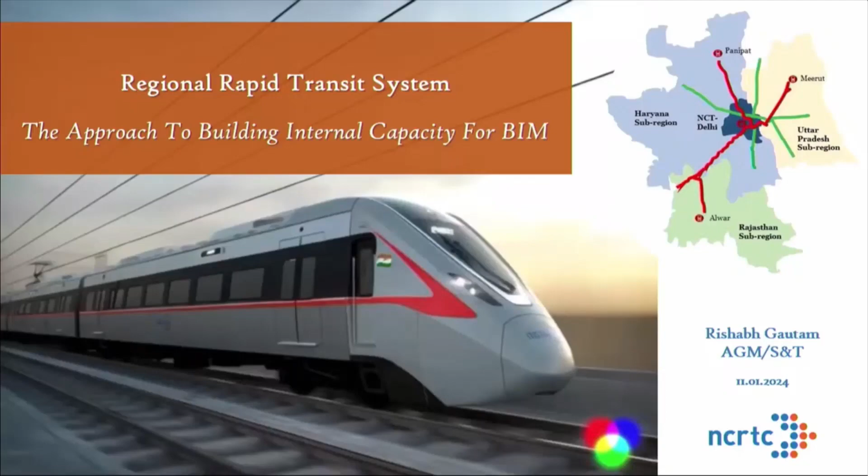So in this presentation, we'll be covering what the NCRTC RRTS project is, Namo Bharat, which was recently inaugurated by our Honorable Prime Minister on 20th of October. A BIM workflow overview, which has already been covered, but I'll just quickly go through it. What we mean by BIM implementation in NCRTC, as in what deliverables we are expecting our contractors and our consultants to give. What is the current status of BIM implementation in NCRTC, where we stand right now as on date.

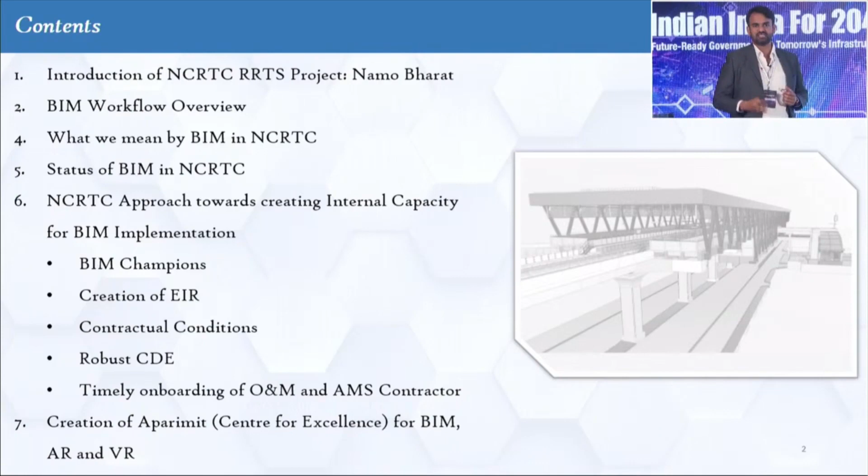And then we'll directly jump into the topic about how NCRTC has created an internal capacity within the organization so that we can derive the maximum out of this BIM implementation challenge that we took up. So Regional Rapid Transit System is trying to fill in a gap between national level transport and city level transport. We are trying to connect regions within a 20 to 150 kilometer range, Delhi with the neighboring satellite towns with a semi-high speed transport. So our trains are designed to travel at 180 kmph and travel at 160 kmph.

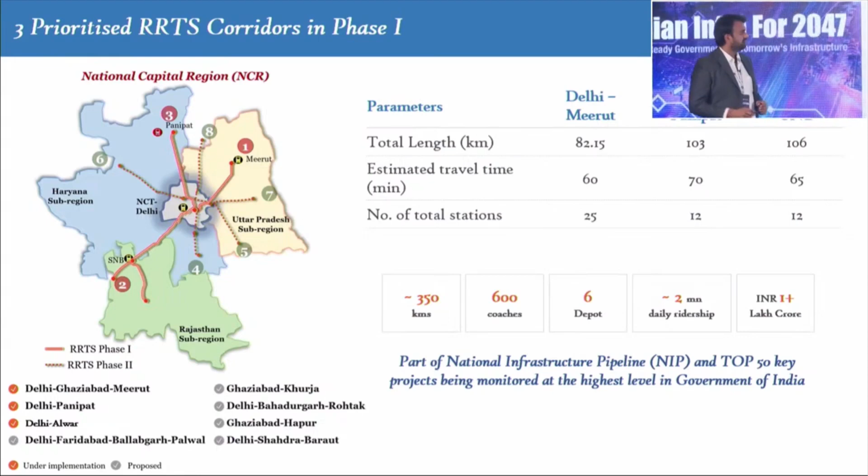So NCRTC, National Capital Region Transport Corporation, is tasked with building India's first regional rapid transit system corridors. So in phase 1, we have prioritized 3 corridors, of which the Delhi-Meerut corridor is already under construction, and the first 17 kilometers has already been inaugurated. The other 2 corridors are Delhi-Panipat and Delhi-SNB. And this is already part of the national infrastructure pipeline which Abhishek ji was talking about earlier. And there are 5 other corridors planned as part of the RRTS plan.

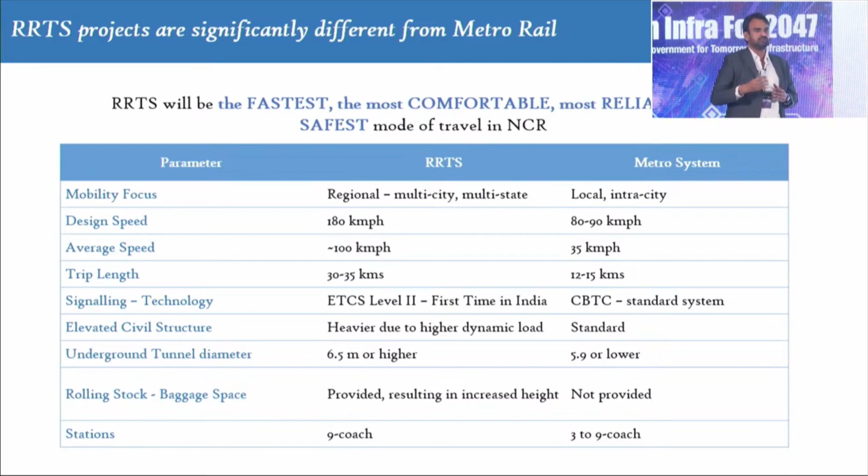So as I said earlier, the RRTS vis-a-vis metro is a semi-high speed rail infrastructure designed for 180 kmph with an average speed of 100 kmph including stoppages. Now this really takes the suburban cities within the reach, so people can actually commute daily and go back to their hometown after they have done their jobs or studies.

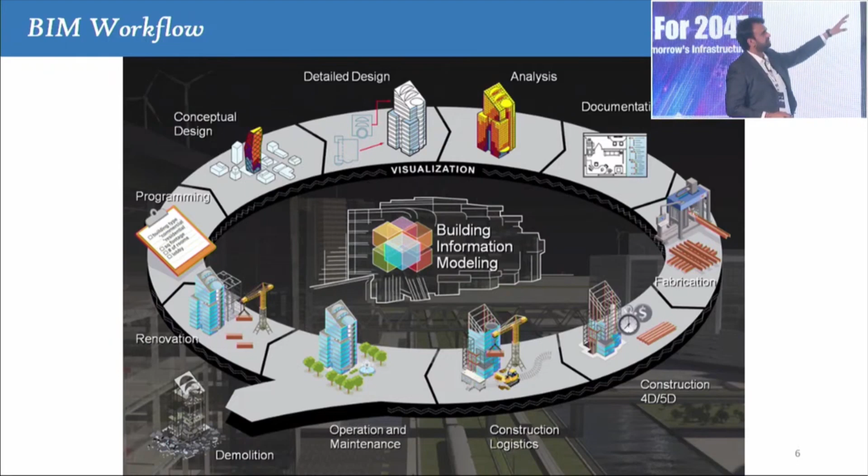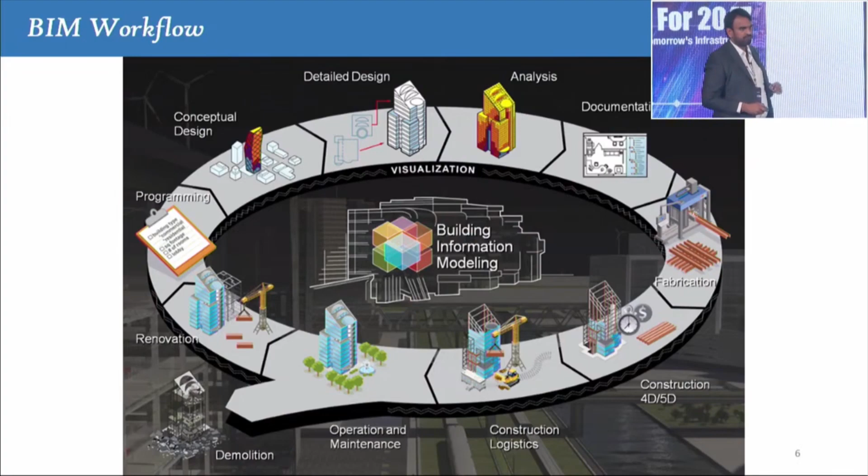So I'll directly jump into the BIM workflow. NCRTC has adopted BIM from the very beginning. Right from the programming and conceptual stage, we have followed all the steps which we are all aware of. So I won't talk in detail about all these steps, but jump into what we mean when we say BIM implementation in NCRTC. So 3D is a given, right? But we have a shared information model. So these are not just dumb 3D models, they have rich metadata captured within this 3D model.

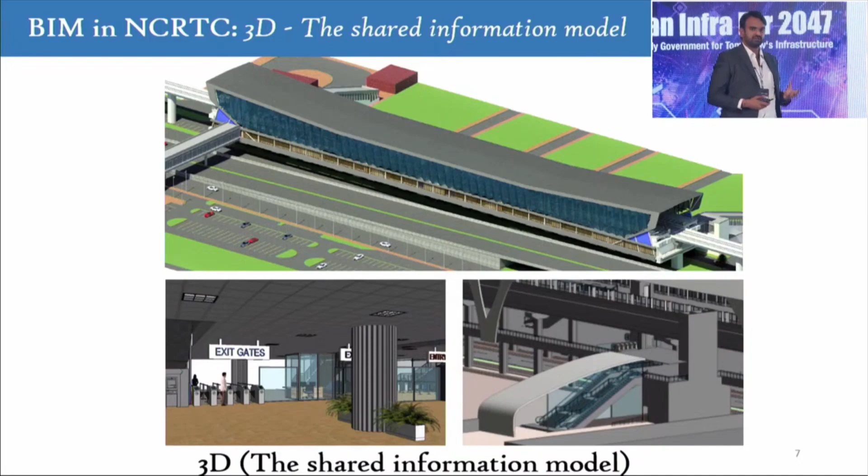We have already implemented 4D BIM, and recently we have had the, can we mute it?

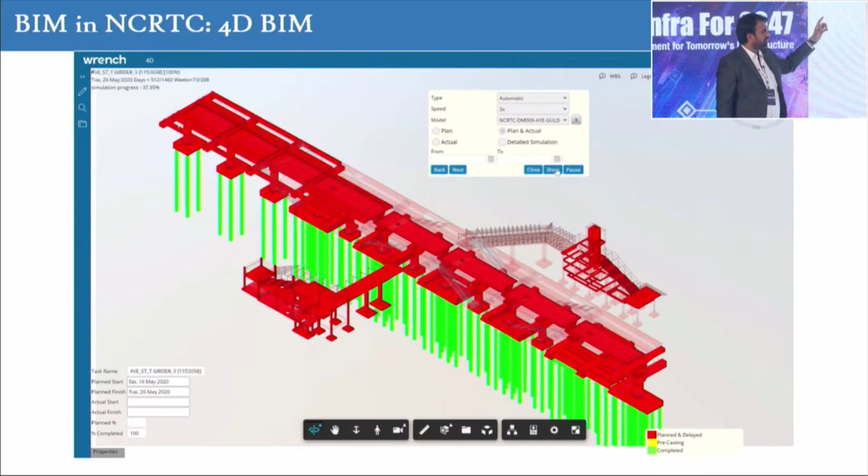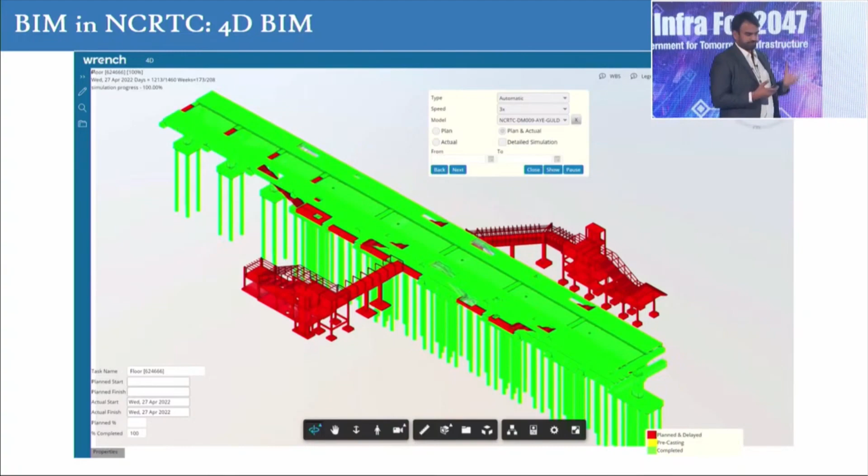And recently we have already inbuilt the capacity of 4D BIM within our common data environment. Earlier we were relying on third-party tools. Now our common data environment actually supports 4D BIM implementation in itself. This is all within the browser, so we don't require any third-party tools. Anyone with a laptop or a phone can actually visualize 4D models right from their tablets or laptops. Again, we are touching upon 5D. We are also implementing 5D where we do cost estimation and cost extraction from the BIM models.

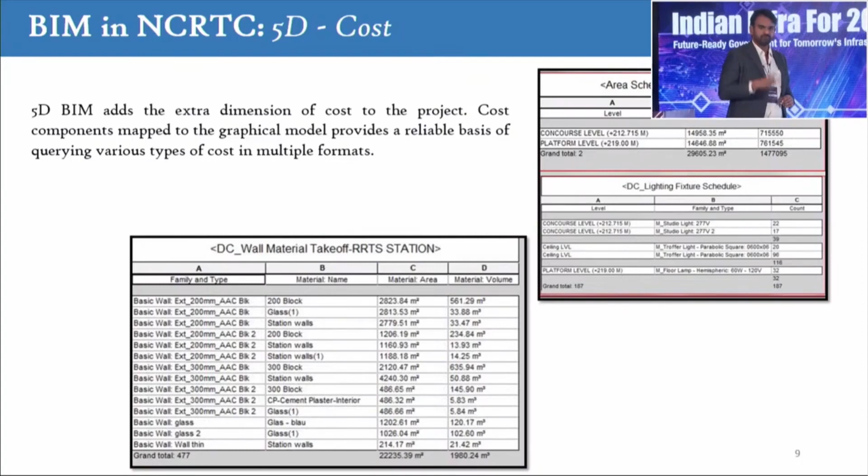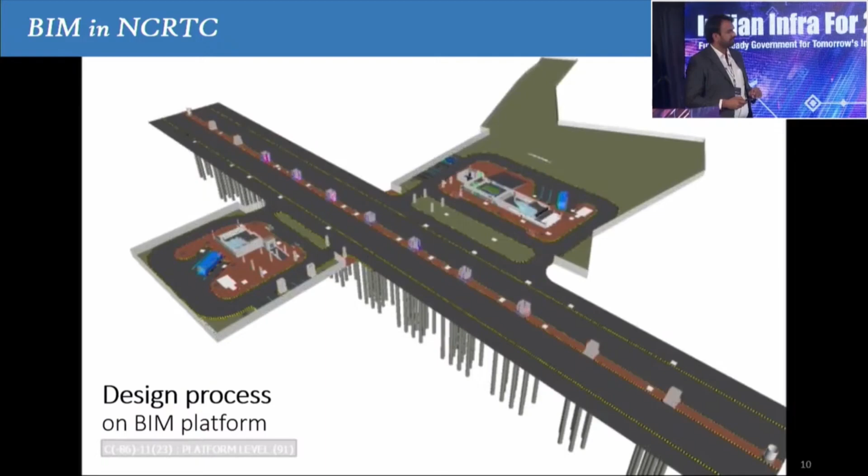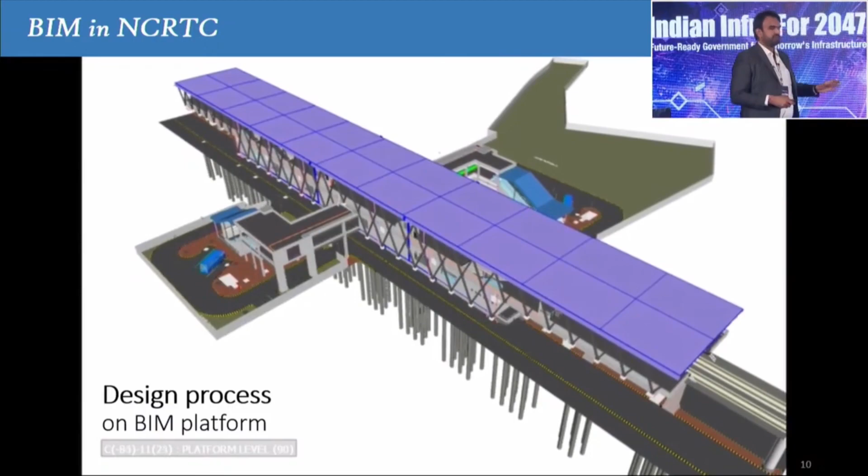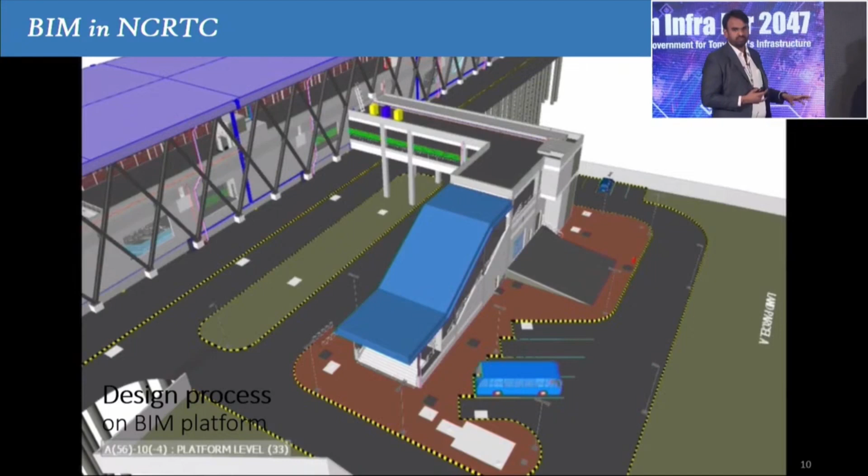This is an interesting video. I'll just let this video play through. This is the design process that we follow. And as said by the earlier speakers, it is very important to actually create the complete 3D model before the actual construction begins. So we were able to build this station as a digital twin even before the construction began. This is very important because once this was done, we were able to integrate it with GIS and assess what utilities needed to be shifted. So even before our contractors were mobilized, we were able to do all utility diversions in time, which saved a lot of time and cost.

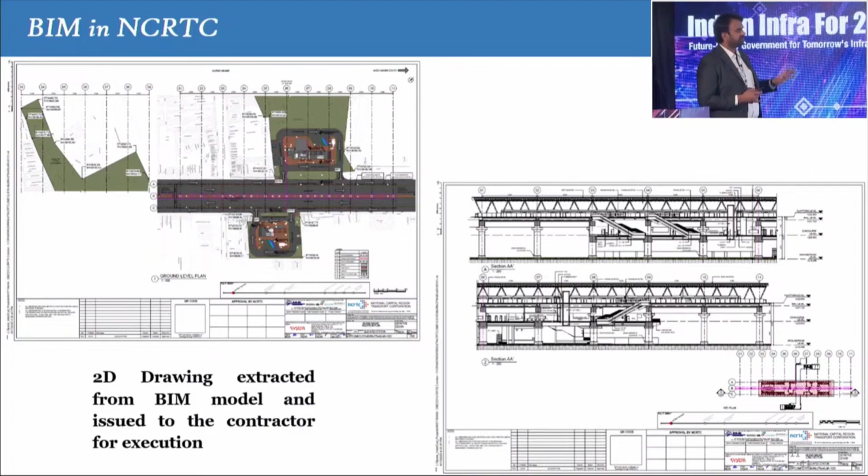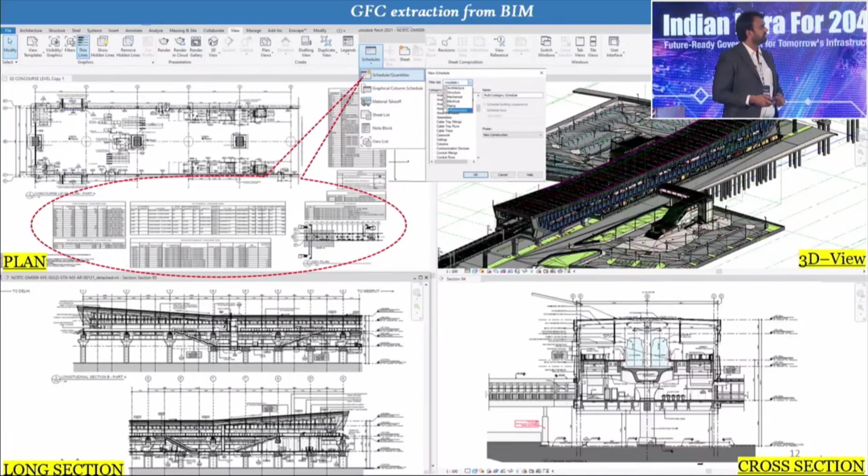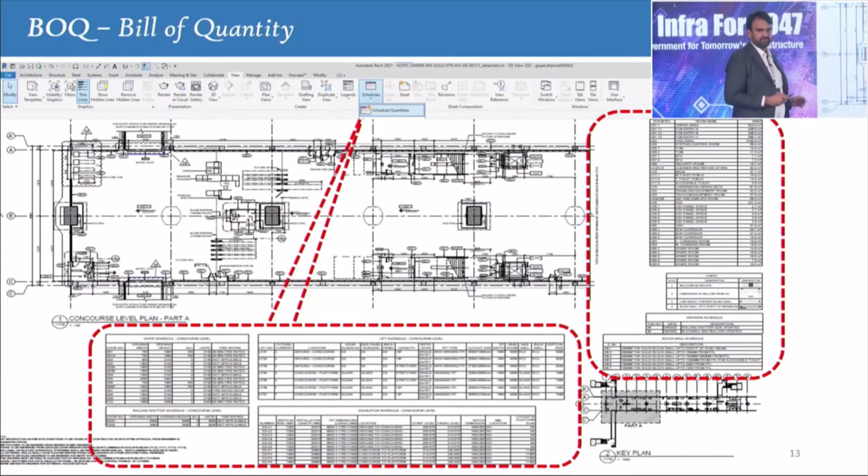When we talk about BIM in NCRTC, there are no 2D drawings. Everything is made in 3D, and 2D drawings are an output of all 3D models. And we have created and formulated these templates, which all our contractors need to follow. Good for construction drawings are extracted from BIM models automatically. Detailed schedules and quantities are also extracted from the BIM models automatically. The bill of quantity, as I said, is extracted automatically from our BIM models, and it's an automated task. It's a one-click process. It really saves time and cost even for our contractors and designers.

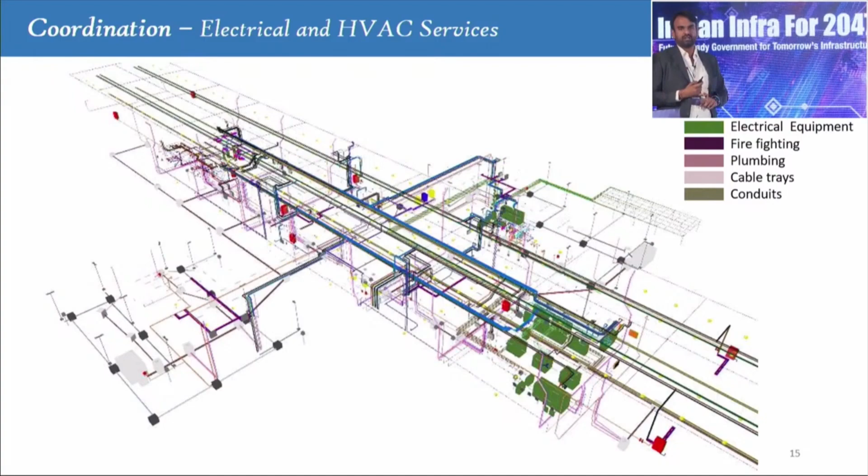So we are implementing BIM across all verticals, be it civil, electrical, plumbing. Even our system contractors are on the BIM platform, and they're providing us 3D models of all the system assets available.

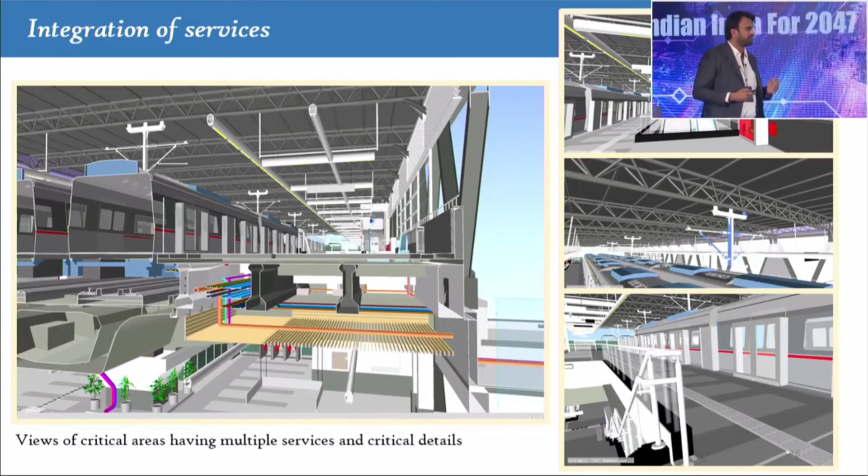Just to highlight, so everyone knows what BIM is. We have seen a lot of 3D models, just trying to show that we have actually implemented BIM to the level that we wanted it to be. So even the small pipes, conduits, wires, everything is modeled. And this is what we defined in our EIR, our employer's information requirement, to what level of detailing we really want information to be captured.

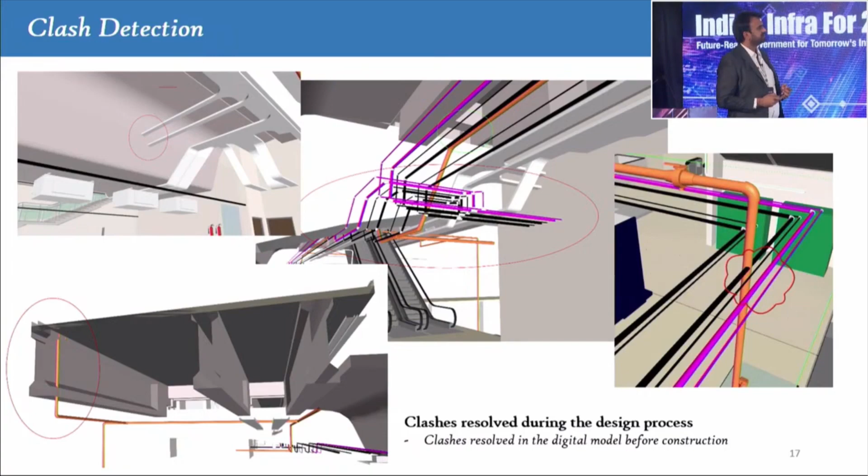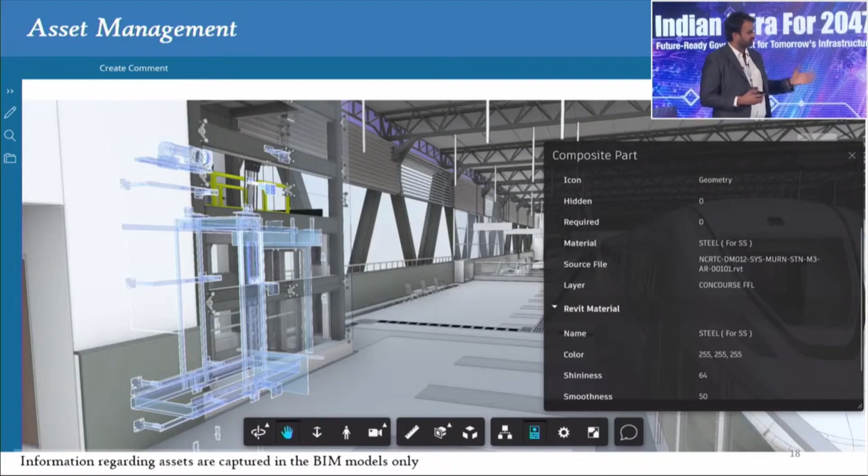Clash detection, the obvious benefits that we get during the construction phase of the project. And then going to the 7th dimension, that is asset management. So we have IBM Maximo as our AMS system, and we are lucky enough that our contractors and our AMS contractors are both onboarded right now, and they're able to interface and iron out any problems that may arise while transforming information through COBie from our BIM to our AMS system.

So now jumping to the topic at hand. What is the status of BIM in NCRTC, and how we actually ended up building capacity for BIM implementation within NCRTC. So as I said earlier, NCRTC has already adopted BIM from the very beginning of the project. So I joined NCRTC in 2017, and even then there were only a handful of employees. There were 10 employees in the organization at that point of time in 2017, and we were given a very clear mandate that we want to adopt BIM processes.

And the very first step was we wanted to create a BIM EIR and get a very robust common data environment. Now, I cannot emphasize it enough that we need to have a very robust and user-friendly common data environment. I have seen good projects fail because the common data environment was very complicated. People did not want to use the common data environment.

So when we started this journey in 2017, we visited many projects across India to study the BIM implementation that they were doing. And we created reports of what are the good aspects of those BIM implementation projects. We visited Nagpur, we visited Hyderabad, and then we understood that this is what they did right, and these are the mistakes that we can actually learn from. We incorporated all those learnings in our EIR, and we spent a lot of time in creating a tender for a common data environment, which would actually give us a cost-effective common data environment which is easy to use.

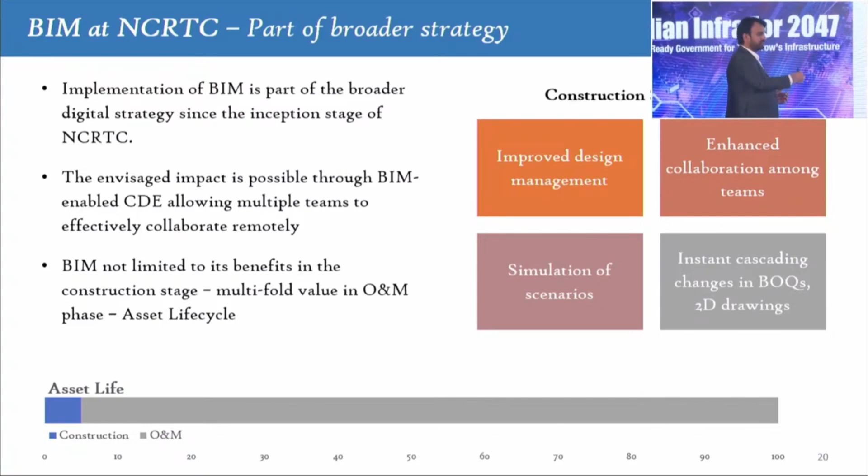And as everyone has said before, BIM is not limited to the benefits during the construction phase of the project. So imagine, the Delhi Meerut corridor is a $4.5 billion project, 30,000 crores, right? The construction phase of the project was greenlit in 2019, and we have already constructed and launched the first priority corridor. So the construction phase of the project is 4 to 5 years, right? Most of the benefits and the life of the project is going to be for the next 50, 60 years. So how do we derive benefit of all the rich information that we have gathered in our BIM models during the asset maintenance phase? This was our focus from the very beginning, and this we very accurately captured in our EIR.

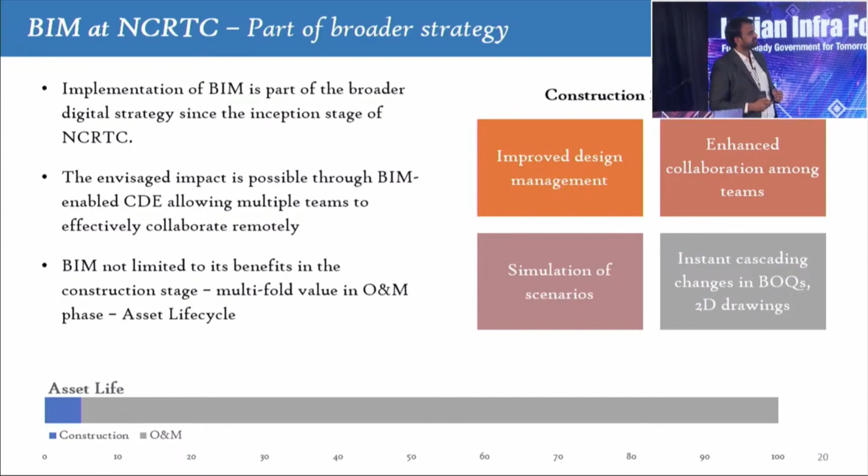So as rightly said by Darshan and Abhishek ji before me, we really need to nominate champions. If we want to make any project successful, it is very important, very critical that we identify champions within the organization who will take this endeavor forward. So very early on in the project, we involved many people from all verticals of the organization and made them BIM champions, who were then tasked to spread this information of how to use BIM and why BIM was necessary within the organization.

Procuring a BIM-enabled common data environment, that was critical. And then followed by creation of a detailed employer's information requirement and of robust BIM templates and standards. So because of the lack of any standardized BIM templates and EIR to follow, we took it upon ourselves to create an EIR from scratch in NCRTC. And in order to have uniformity in the drawings and models submitted, we created our own BIM templates and BIM standards.

And then what we did was we mandated these EIRs and templates through contracts. These standards were created before we floated the contracts, and this is very critical. If your contracts are floated which do not have any clauses for mandating BIM implementation by your contractors, they will avoid it at all costs. But when you make it part of the contract, they can't avoid it, and they'll have to deliver it.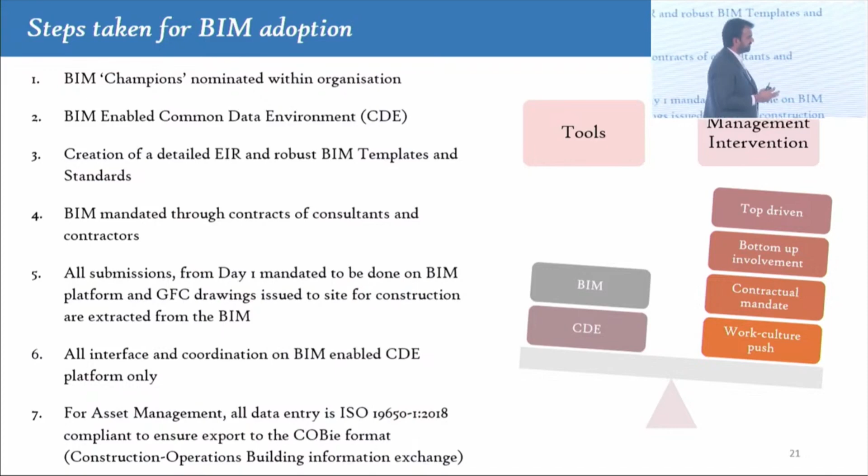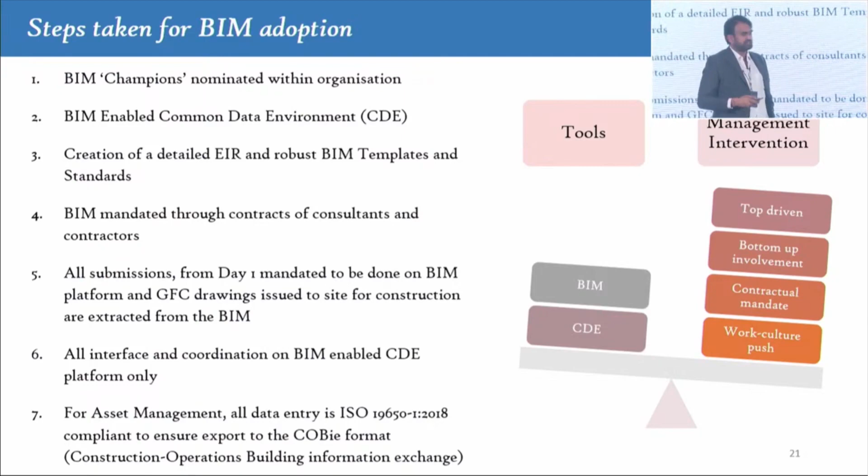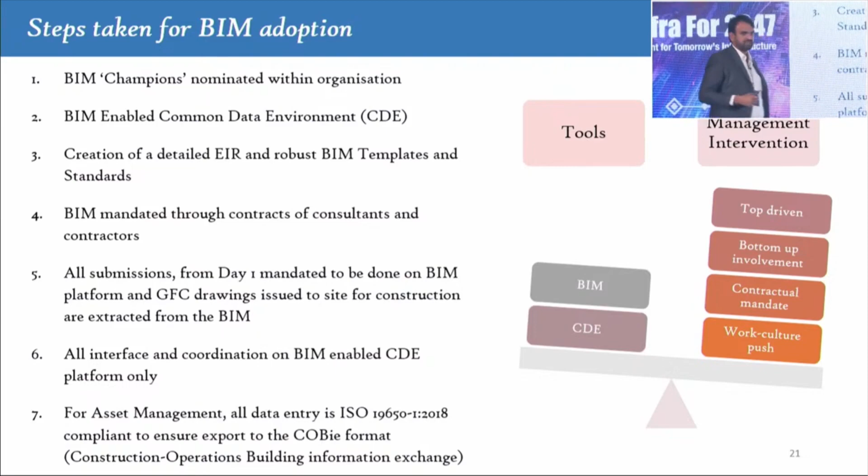Now, what is more important? If you see that figure, the tools are important. BIM tools and the common data environment are very important. But what is more important, it has to be a management-driven initiative. It has to be a top-down initiative. If the management supports this, everyone will actually fall in line with it. And then you need to build up competency from the ground level, because the high-level management can only get involved to a certain extent. The day-to-day usage falls with the junior engineers, the civil engineers, the assistant managers. They really need to be updated on the latest technology available. And then we talk about contractual mandate and work culture push.

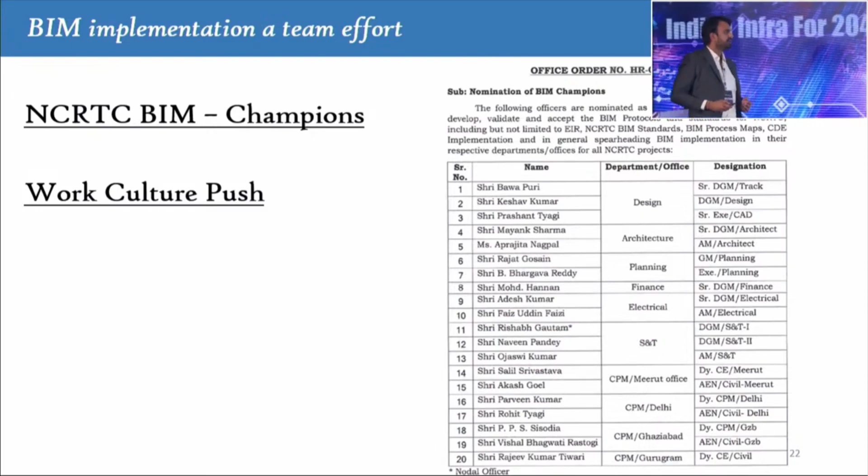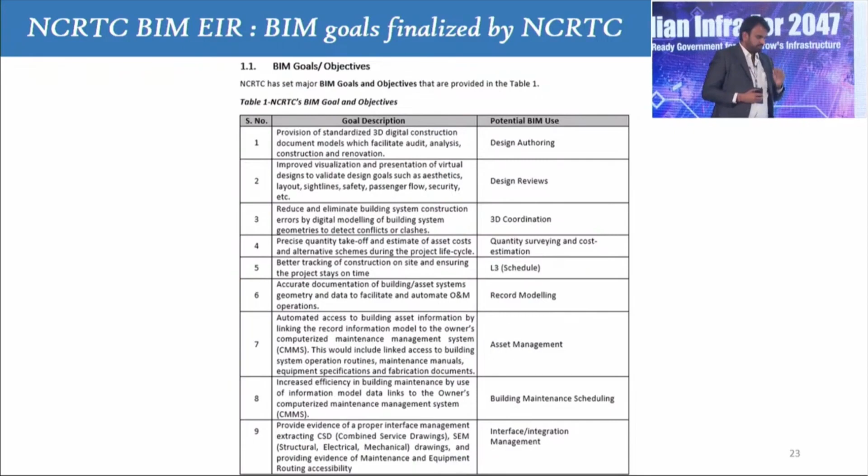Then we created a BIM EIR, where we detailed out the BIM goals and objectives we understand from BIM. BIM is a very wide topic, which can have a lot of meanings for different verticals and companies. So what we expected out of our BIM models as NCRTC, as a railway project, we really detailed out in our BIM EIR, which was a 40-60 page document that comprehensively captured what we needed.

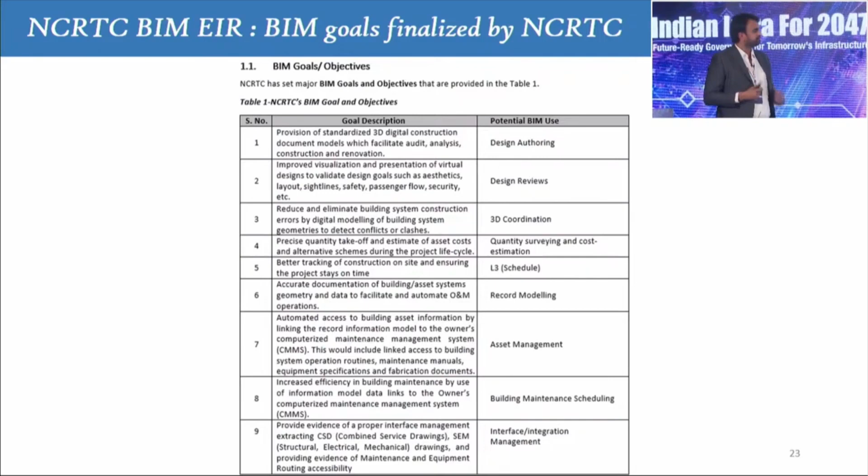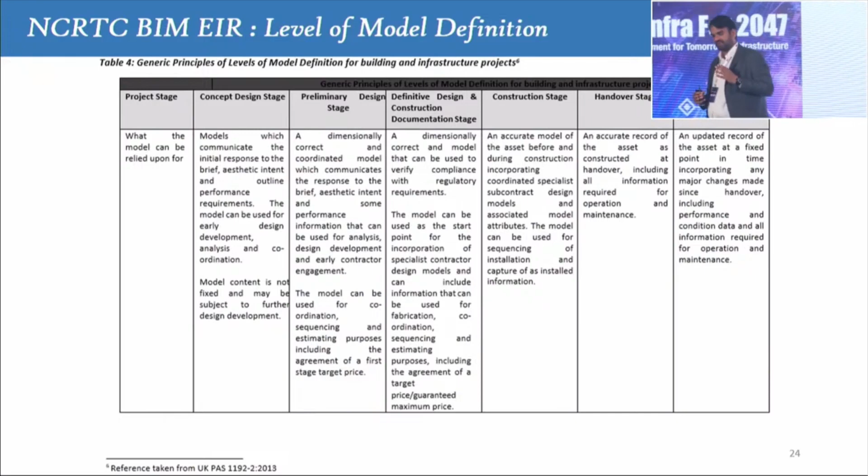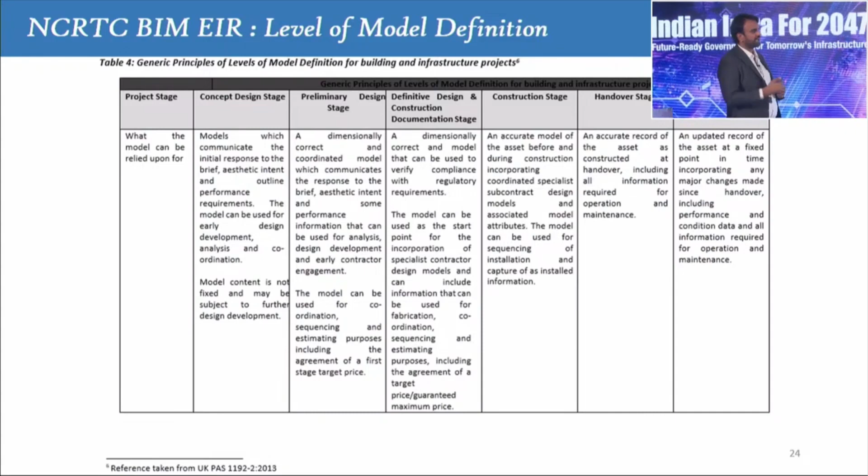And then we detailed out at various levels of project delivery what the contractor needed to deliver. If our EIR and standards are elaborate enough, the contractors can correctly estimate the time and effort they need to put into the project, which avoids conflicts later during execution. If we do not have a very elaborate EIR, we will have conflicts: this was not asked in the contract, you are asking for something more, it's costing me more. They would land up in variations. But having a well-detailed and clear-cut EIR enables us to have smooth project delivery without any conflicts with our contractors.

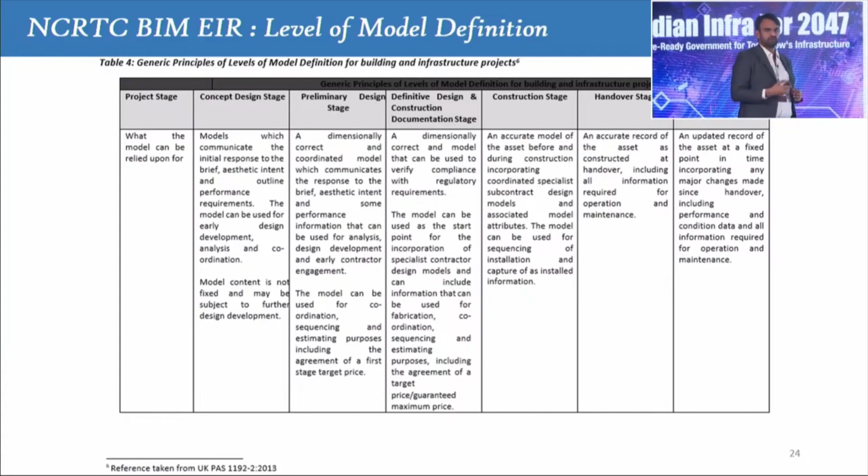So within every contract in NCRTC, there was a separate annexure for EIR and CAD standards that we created within NCRTC. This really helped us achieve the BIM objectives that we were looking for. It would not have been possible if this was not done. All the steps that we have mentioned are critical, but again, having contractual conditions implemented into the contract is of utmost importance.

Apart from the EIR and BIM standards, we made it very clear that we will not be responsible for any training. This was one of the feedbacks that we were getting from the industry, that people are not trained on it. We did the market study, we did the analysis, and we found out that there are trained resources available in the industry right now, and we made it very clear that we will not be involved in the training of those resources. You just hire the right resources and get them on the project. Let them train it, right? Because otherwise they would have used this as an excuse to delay the implementation of the project.

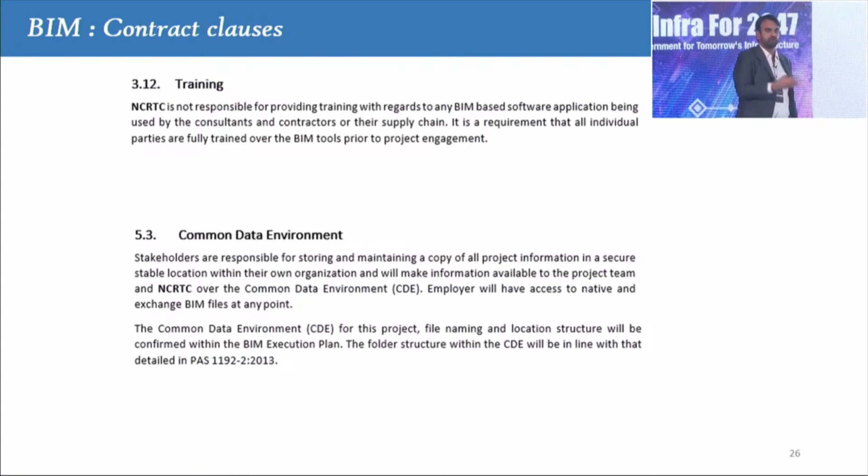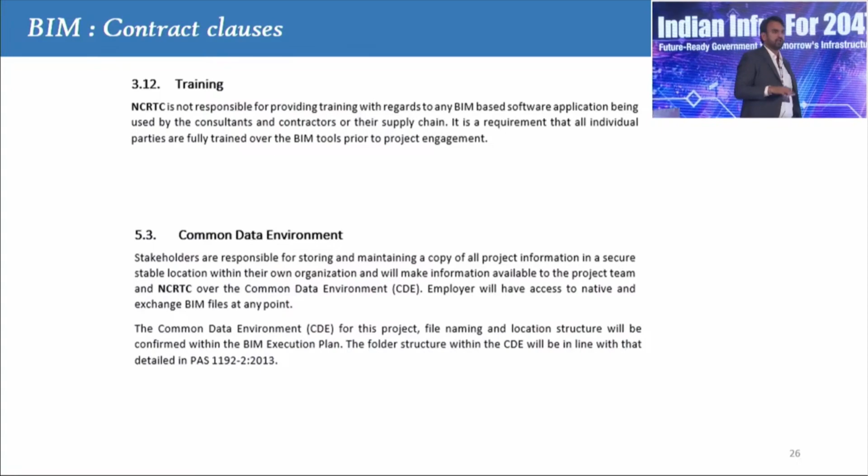We took it upon ourselves to provide the common data environment free of cost to all contractors. Now, a common data environment can only be successful if it is implemented at the grassroots level. That actually meant handing out a lot of licenses. Luckily, India being a software IT hub, we were able to get a really good and competent common data environment at a very cost-effective rate. And we had unlimited licenses built into our contract. So we were able to actually hand out common data environment licenses right across NCRTC for all employees, and even multiple licenses to our contractors.

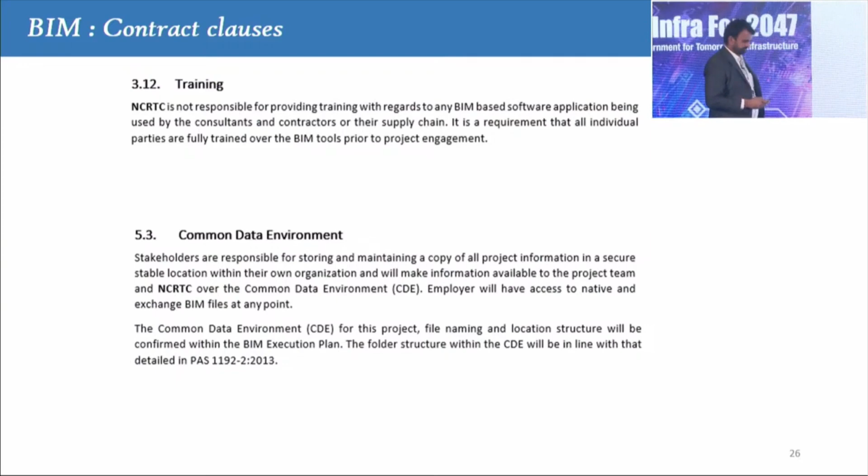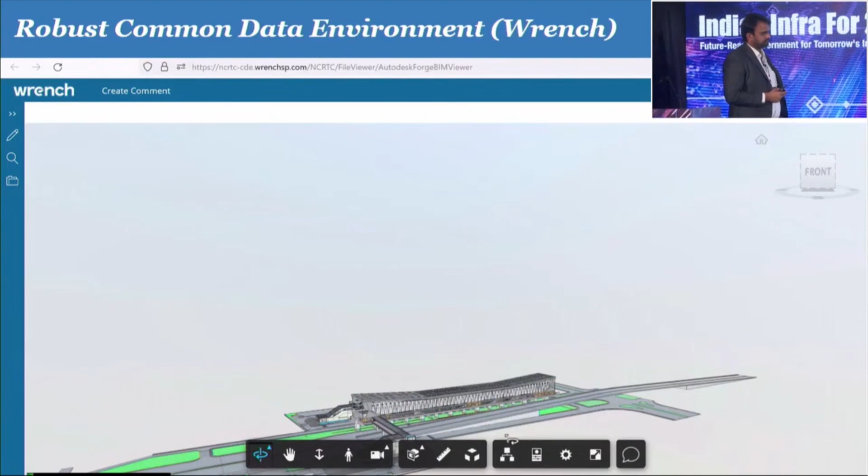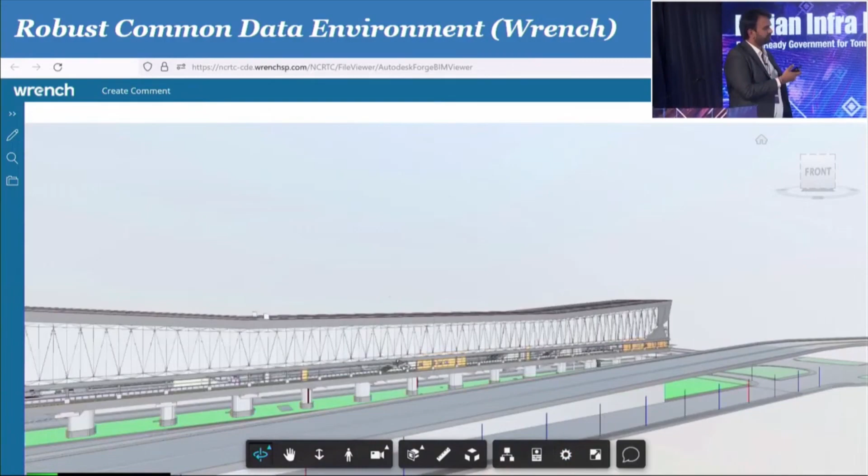So our common data environment is Wrench, which is an Indian firm. So this is just a small demo video of how through a browser we can actually perform all the tasks without the need of any third-party software. We are not playing the video in fast motion, this is the actual time it takes. A heavy model opens in a couple of minutes. This model would be approximately 500 MB or 1 GB. And then we are able to easily navigate through a complete station model within the browser itself.

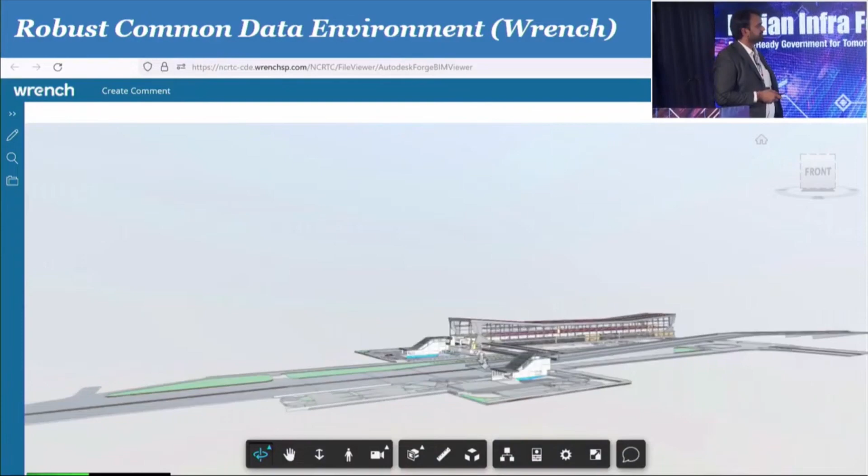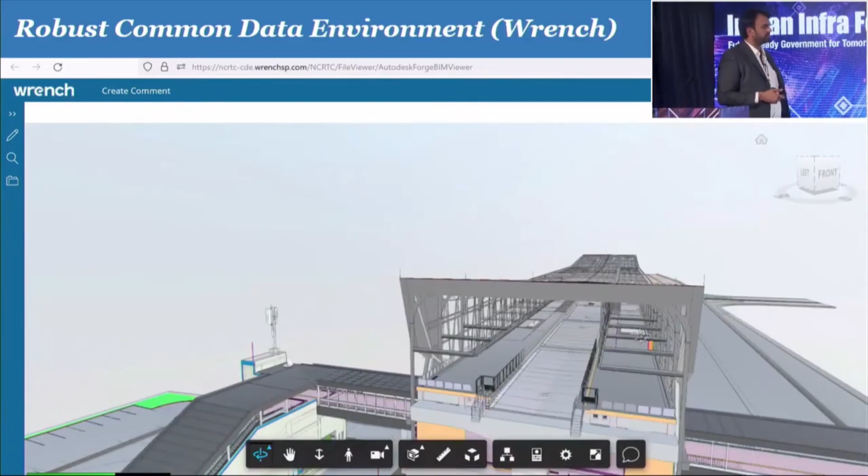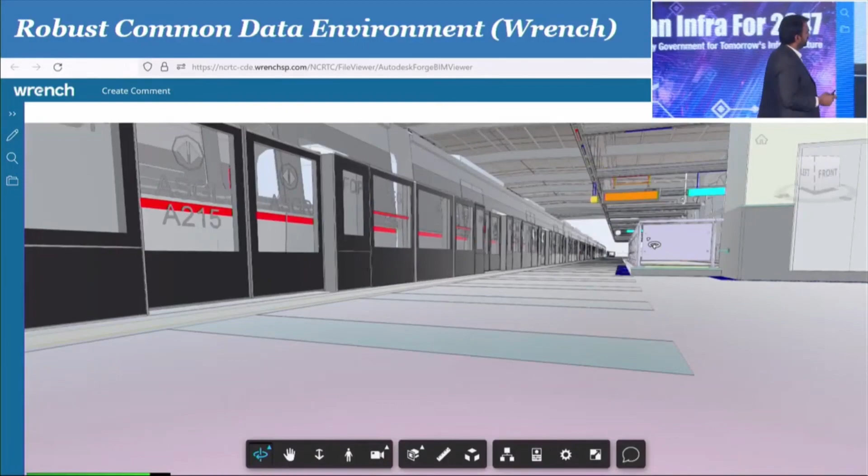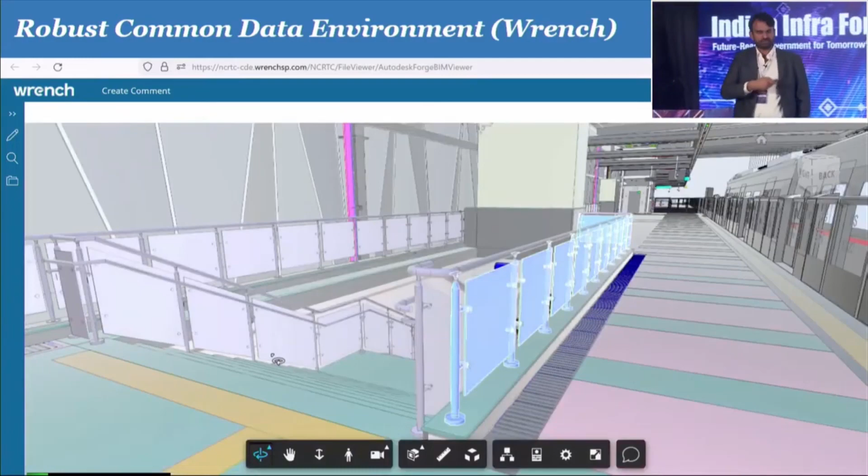And all these models, again reiterating, were built before the actual construction began at ground. And everything, right from the small details to pits, pads, platform screen doors, all our system contractors provided the as-built models of their machines and systems, which were incorporated into the BIM model provided by the civil contractor. And for our asset management system, we asked for LOD 500 models, which were then passed on to our IBM Maximo AMS system. So I'll skip the video. In the later part of the video, they give an example of how we do annotation and commenting right on the browser itself.

Another reason we were able to successfully implement BIM in NCRTC is the timely onboarding of our O&M and AMS contractor, which is also very critical. As a client, we have DB, Deutsche Bahn, as our O&M operator, and we have Accenture, who has brought in IBM Maximo as our AMS contractor. Now, if the onboarding of these contractors had been delayed, our contractor would have submitted files which we would not have had time to validate. Having them onboarded, our AMS contractor can actually validate if the COBie files are good enough to be passed on to the AMS system, and our O&M contractor DB can validate if the information being passed on is useful for them or not. And this is really critical.

If our contractor leaves and then the O&M contractor starts complaining that the information you have provided is of no good to me, then we are in a catch-22. We can't actually catch hold of the contractor, and we can't do much for our O&M contractor. So timely onboarding of our O&M and AMS contractors was very beneficial for us, because now while the project is being executed, they are able to comment and get things corrected. This saves a lot of interface time as well.

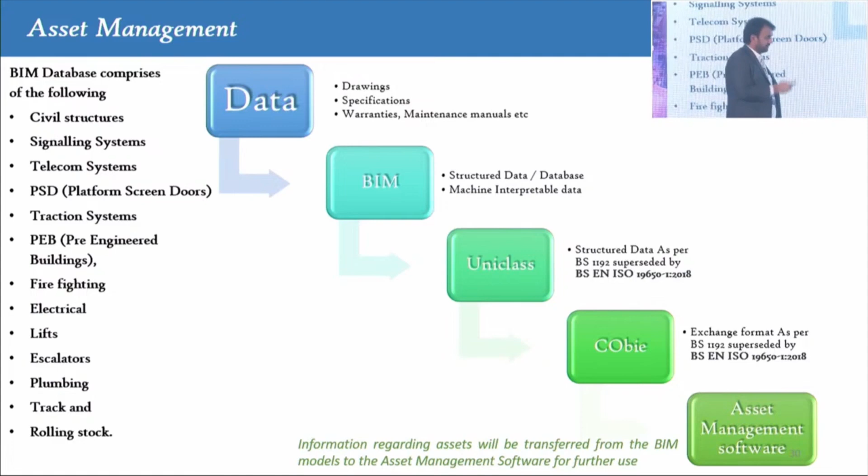Just quickly focusing on the AMS part, right? All the drawings, specifications, warranties, maintenance manuals, everything is now embedded into our BIM model. Our structured database and machine interpretable data is now coded into Uniclass, which is then passed on through COBie to our AMS software.

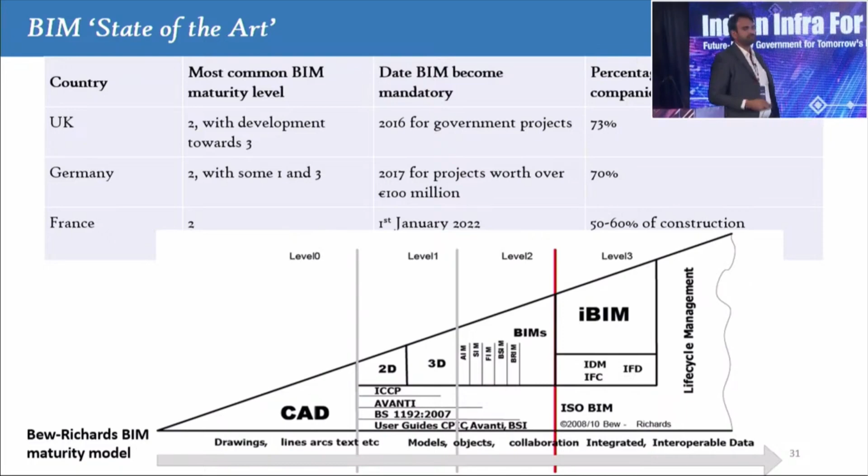Just quickly trying to focus on what people have already talked about earlier. Globally, countries are mandating BIM implementation, and it is driven by the government. We also feel that there's a need for similar guidelines and instructions to be made or mandated by the government, so that we can have adoption of BIM across large infrastructure projects.

Then lastly, I would like to touch upon Aparimit, which is a center for excellence that we have created within NCRTC. And this was partly funded by Asian Development Bank and the British High Commission. So within Aparimit, we have set up our Center for Excellence for Building Information Modeling, Augmented Reality and Virtual Reality. Since we onboarded onto the BIM processes early on into the project and our contractors complied, we were able to actually go for futuristic use cases of building information modeling, which is augmented reality and virtual reality.

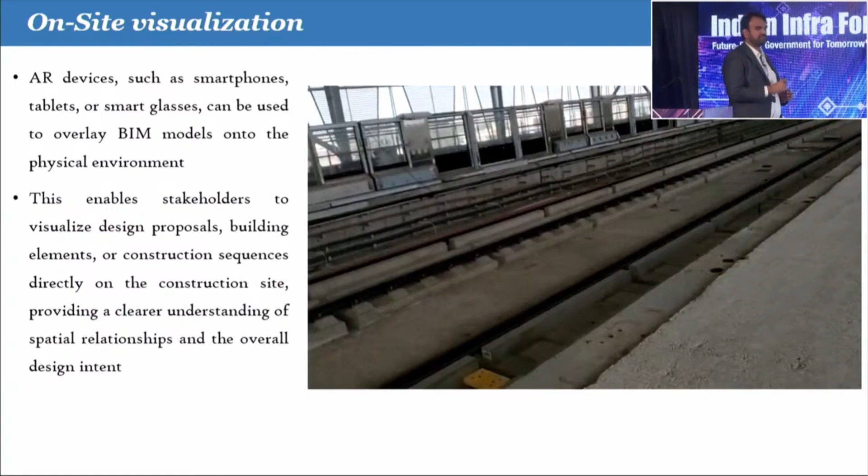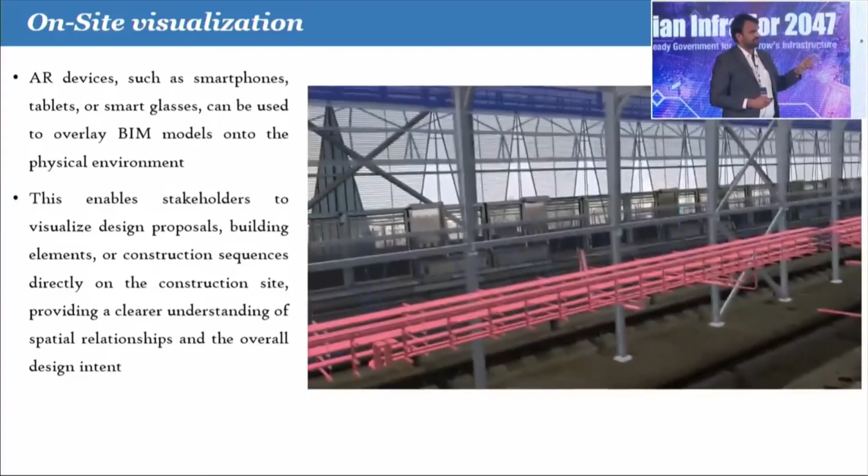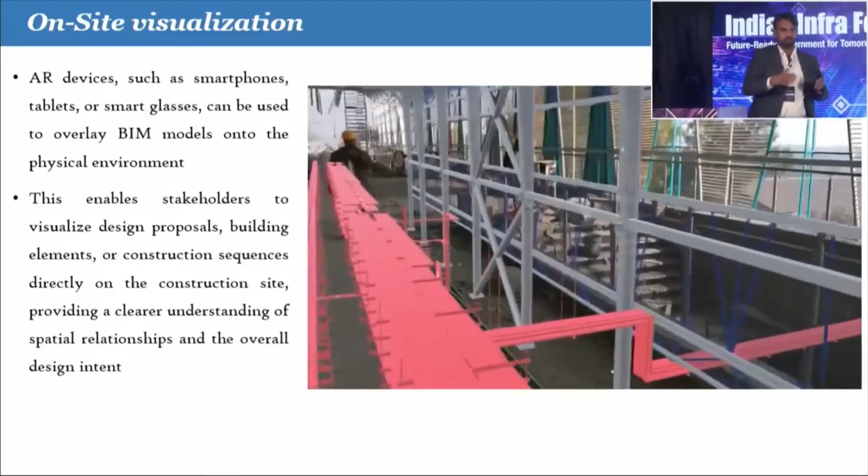So now we don't actually focus on if our contractor will give us the 3D model or not, if they will do 4D or 5D. We focus on how we can actually utilize this rich information for making our construction more smooth. So this is a small example of how we are using augmented reality to visualize construction before it happens at site. So we can actually use this augmented reality model, which we have created from the BIM information model provided to us, without any additional cost. So the BIM models, through use of certain softwares, can directly be translated into AR-based models.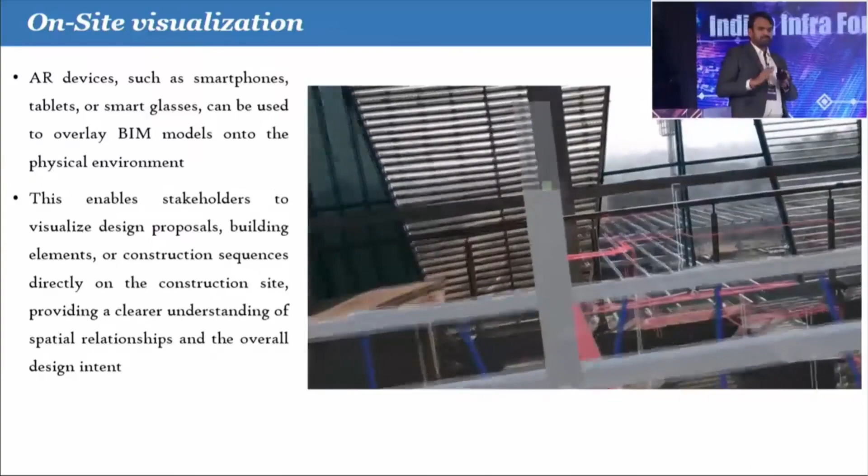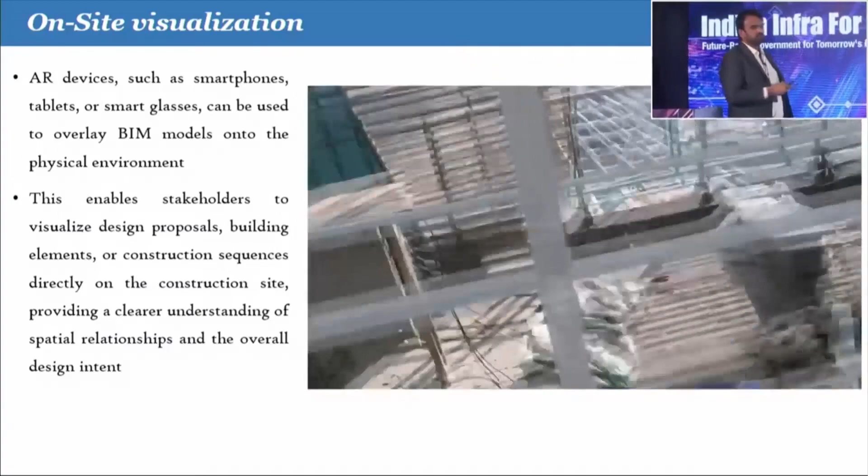So what I'm trying to emphasize is, the time is right now that we don't focus on the very basics of what BIM is. We have to take them for granted and focus on the future use cases of what BIM can be. This can actually be utilized to validate if the construction is being done as per the design at site in real time. Just a small use case POC that we have done. We were able to validate if the platform screens were installed as per the drawing, if all the nuts and bolts were matching or not.

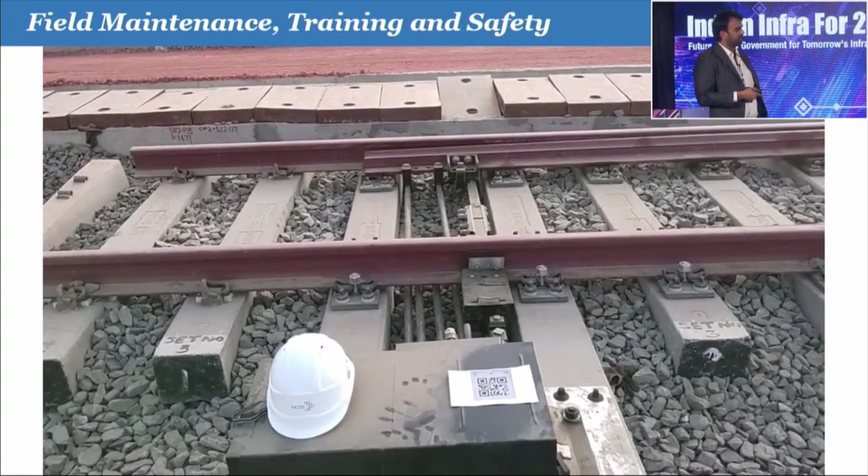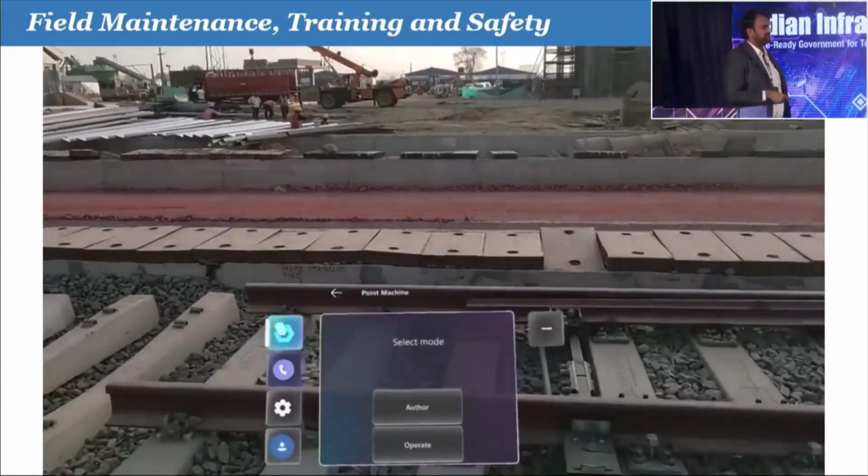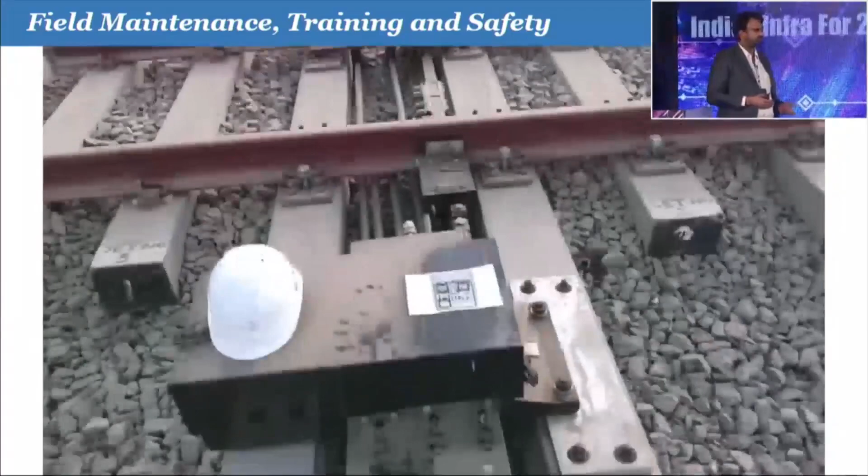We are also able to create SOPs for maintenance; we are digitally converting our physical SOPs into AR-based training modules. So this is an augmented reality based training module for an IRS point machine. Again, all this has been enabled because we adopted BIM processes right from the very beginning. So by scanning a small QR code, we are able to align the virtual world and the real world on top of each other. The QR code acts as a coordinate system, a very cheap and cost-effective way. It costs us nothing to print a QR code. And now we can have guided maintenance.

And if you can just go to the further part of the presentation, one thing we like to show in this video is, while doing maintenance, if you forget an action, since these devices are connected to the internet, or our common data environment, we can actually download the latest manual or the last maintenance sheets that were filled right into our headset while doing maintenance. So I would know who did the last maintenance, what were the various values, current electrical voltage values when the maintenance was done, what level of maintenance was done during the last maintenance visit. All that information can be directly downloaded from a common data environment into the headset while doing maintenance. So I do not need to physically carry any papers.

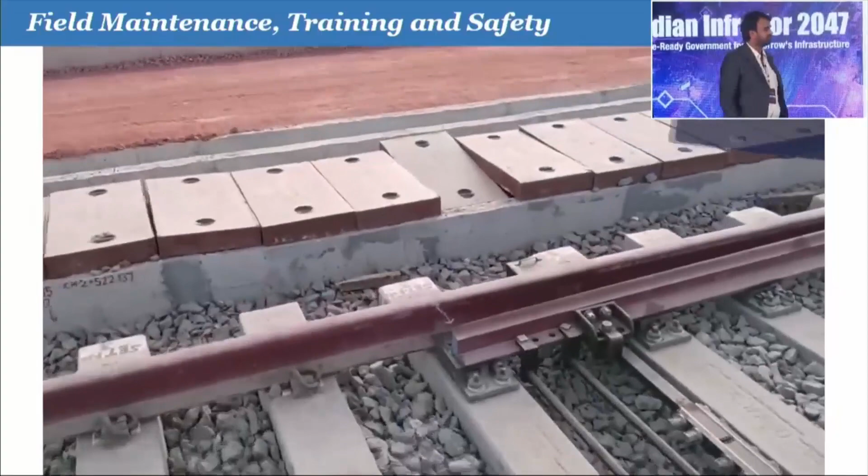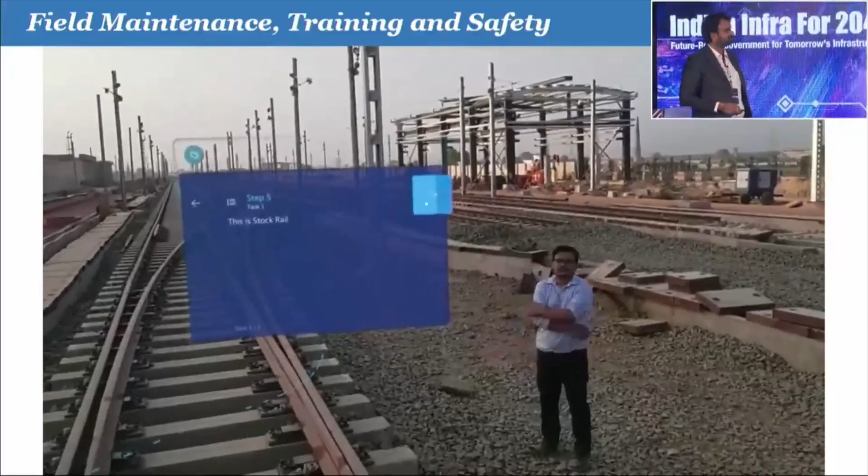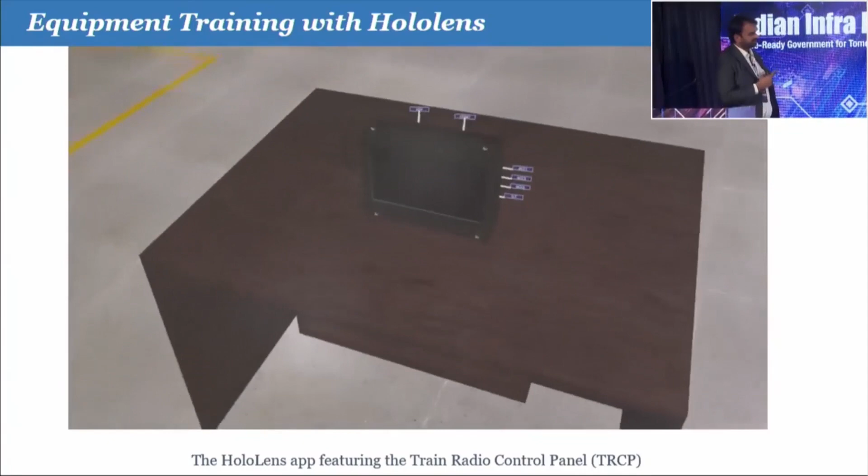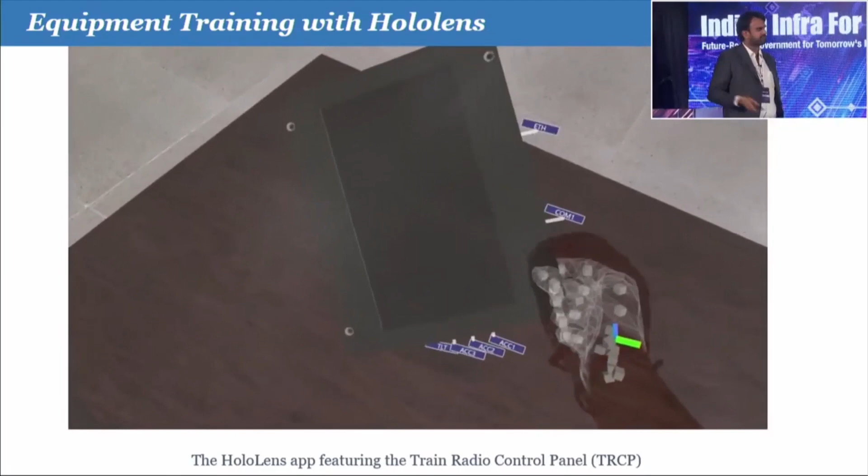So this is a very important parameter. This tongue and stock rail gap should be 160 mm, which we are able to measure accurately through our headset, since we had the digital model available. So these are the various benefits we have of creating digital twins of all our assets. Again, this is VR augmented reality based training. This is in HoloLens. Just with the click of a button, we are able to create a table. This is a train radio control panel which is actually installed in the train, and we are able to train our employees on this as many times as they want. So one of the various intangible benefits of having adopted BIM processes.

And we have also now started integrating 3D printing. Because we have 3D models available for all our assets, we can actually replace, this is not a metal 3D printer, it's an FDM 3D printer, we can replace plastic parts with our own 3D printer without having to go into the warehouses. And this also enables our employees to find creative ways to solve problems. I'll give you an example: we needed to create a special device to hold our camera on our trolley, and we were able to ideate and create that device within the same day. From design to having a prototype in hand within hours, which would not have been possible without these kinds of technologies or having BIM models available.